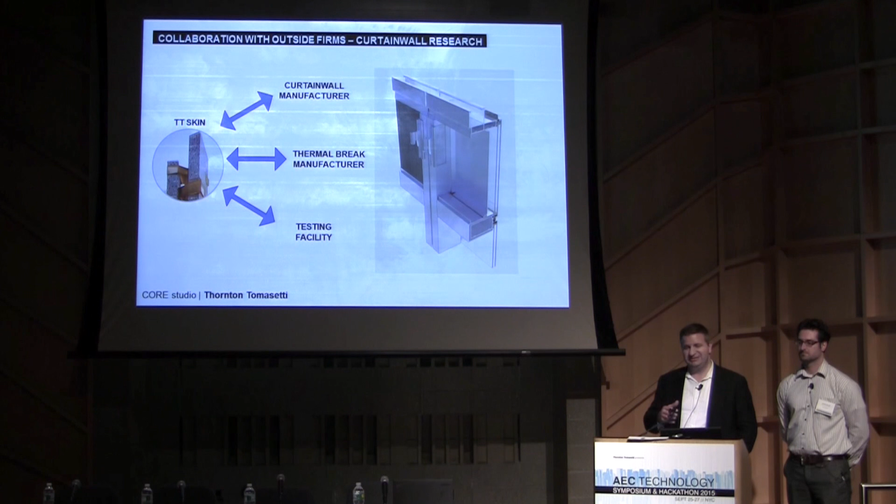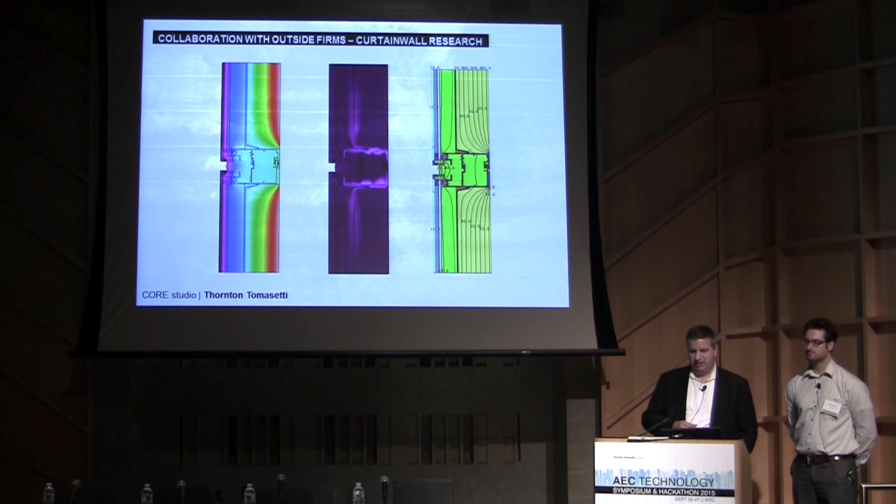Some of the stuff we do is also with outside firms. Our skin group worked with a curtain wall manufacturer, a thermal break manufacturer, and a testing facility to work through different curtain wall details and come up with much more efficient ideas with seals and different materials, really pushing the curtain wall envelope efficiency. And of course, we 3D print, mock up, and test as well.

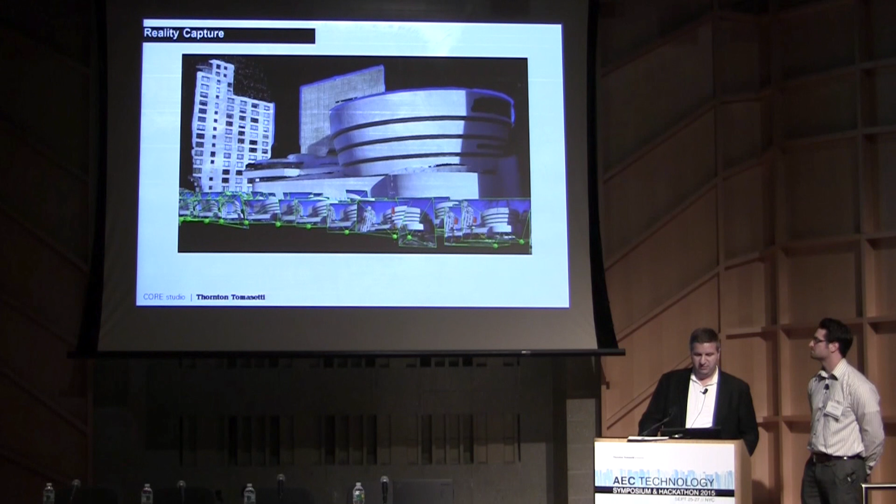One of the big projects we've been working on over the last couple months, for a number of the core group and also other parts of our firm, is reality capture, also known as photogrammetry. We're looking at things like laser scanning, but primarily we're looking at the technology behind photogrammetry, because we feel that's a real push for the future to really capture existing buildings.

A lot of our firm does work on existing buildings, whether we're analyzing an existing structure, building an addition onto one, or analyzing something that unfortunately fell down. We're able to capture that information in much easier ways now. In the past we've used laser scanning, but currently we can just take photos and generate pretty accurate 3D models. So we've been developing a number of technologies around that and investigating a lot of different software.

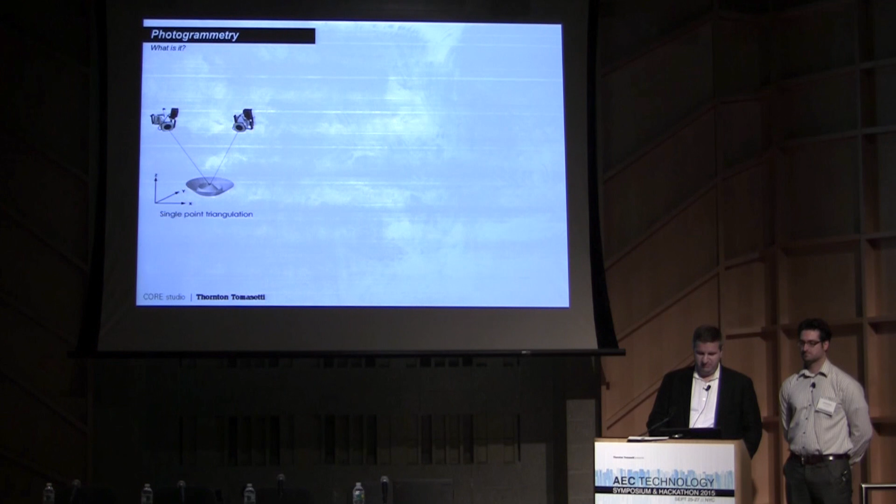In case you're not familiar with the process, it's basically a series of photos. Sometimes you can use GPS to increase the accuracy, and you can generate pretty nice 3D models to work with. It works kind of the same way your eyes do, where you focus on an object and recognize it and get depth perception from it, but it does that across thousands of photos, thousands of times, and you get pretty nice 3D models.

And of course, we take that to the next level by adding some drones. We have a few drones in our office now that we use, probably in about 15 to 20 jobs so far.

So bring in the drones. Basically, it was in a tricky spot to investigate unless you were in a boat or something like that, you couldn't see a lot of the damage.

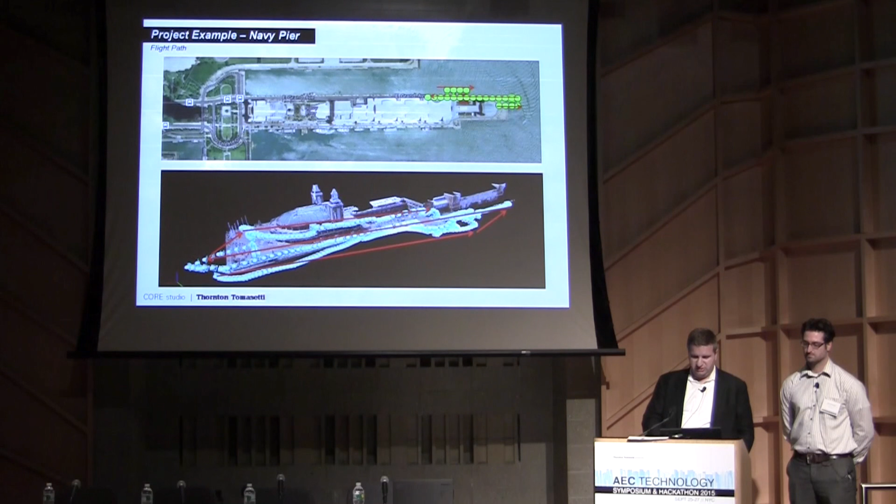So essentially we fly the drone past that whole pier, and we're able to regenerate a 3D model from those images. You can see here all the geolocated images kind of in space.

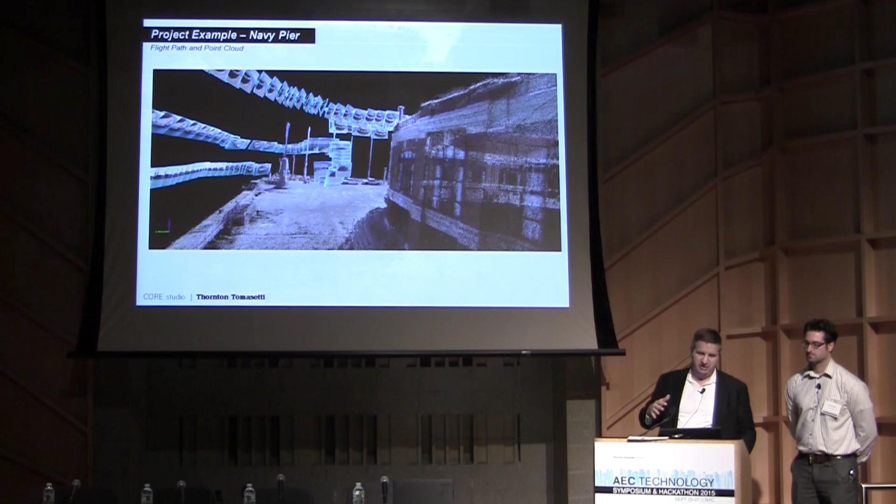What's nice about this is it creates a point cloud that we can work with and see some of the damage, but also get a located record of all these photos. A lot of times our guys are on site taking tons of photos, and then you get back to the office and wonder where that little crack was. Now you know where it is because you can go into the model, click on these images, and bring up the original image where it was taken. So in this case, this is the actual photo above and the 3D model below.

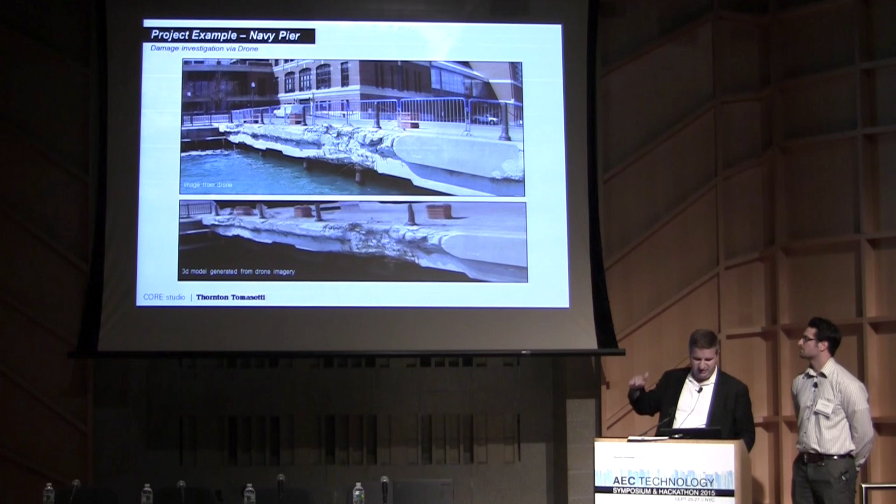Where this was beneficial for us was in the initial design, we're able to model a new roof on top of this 3D scanned photogrammetry model. It's a way quicker process than the laser scanner, and also a lot less expensive, because all you need is a small camera versus a $75,000 laser scanner.

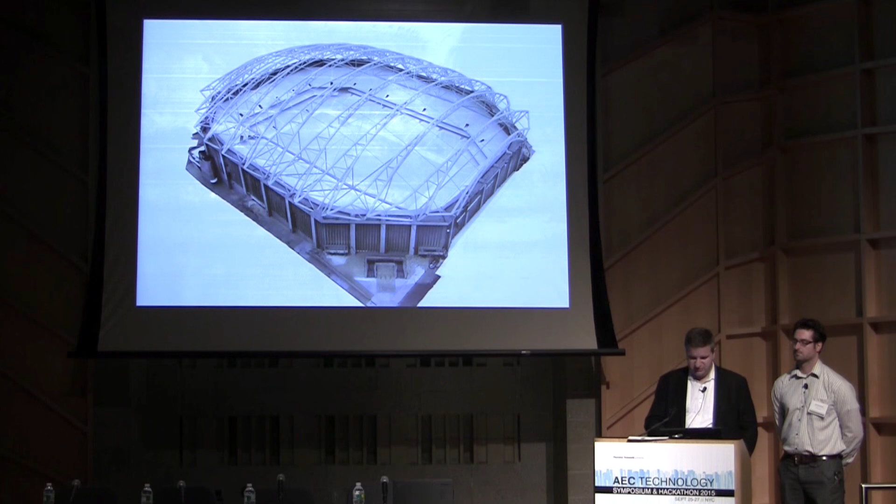Another thing was this damaged structure at a plant in the Midwest. That's supposed to look like that—well, it's not supposed to look like that, the building blew up, but the model's supposed to look like that. That's a fairly accurate model. You can see all the drone photos and some of the ground photos where they were taken.

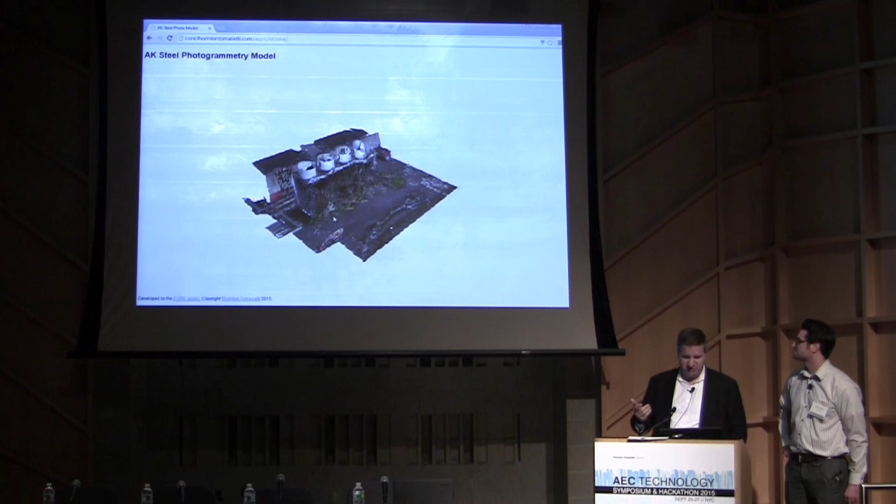And of course, we're mixing this with some of the other technologies we have, with the 3D web viewers. So we can put this out on the web and allow all people on the team to see the information. This is a pretty lightweight web model, kind of low res, but it still gets the idea across of what parts of the building were significantly missing.

I'm going to skip this one.

Our guys in New Zealand are using the drone and camera for all the damage that was done down there. So they can get these nice, very detailed 3D models and see all this damaged brick and things like that. What's nice is that you keep a record in a single model versus hundreds of photos.

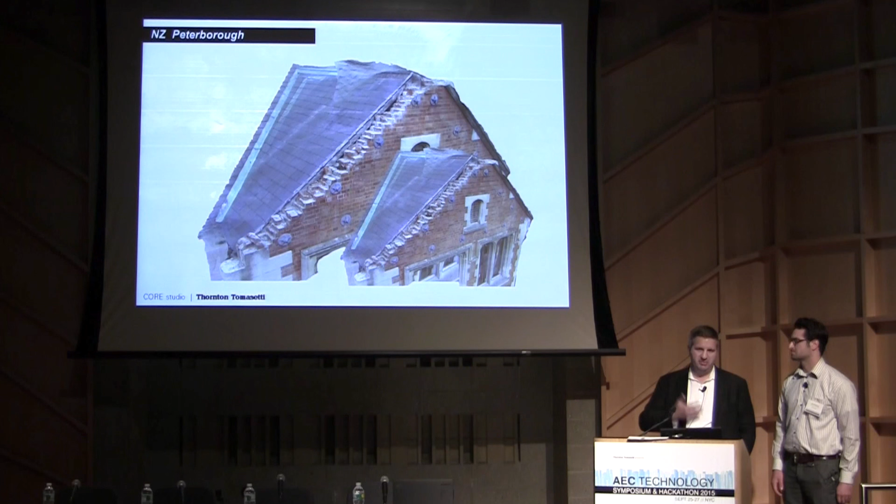We're looking at different ways to augment this now by putting it on the web and adding other information on top of it.

Some future stuff—we have a GPS unit we're experimenting with as well. It's accurate to 1 centimeter anywhere on the planet, which is pretty good, I think, for the construction industry. I think that should be good enough to start with.

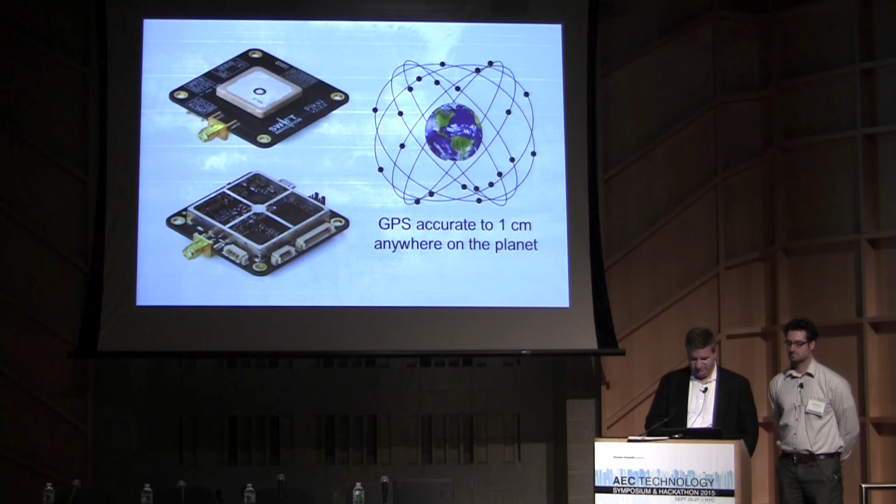Also things like this—these kind of targets that the camera can identify and help locate where you can't get GPS. So on interiors, we can put these on the ground and get the model information in size and dimensions fairly quickly. I'm going to hand it over to Dan now.

Thanks, Justin. So how many people have heard of machine learning before? Okay, great, a lot. How many people have used machine learning before? A fair amount too. Good.

So then I have to do less to explain it. For those who don't know, it's a class of algorithms that use statistics to find patterns in data. We wanted to know—it's being used all over many industries—how can it be used? Can it be used in the AEC industry? So I'll show some experiments to see if it's viable for us.

Now, usually when you talk about statistics in engineering—I'm a structural engineer—it usually brings up the conversation of error. There's always error in everything that we do. So I love this quote: structural engineering is the art of molding materials we don't wholly understand into shapes we can't fully analyze, so as to withstand forces we can't really assess, in such a way that the community at large has no reason to suspect the extent of our ignorance.

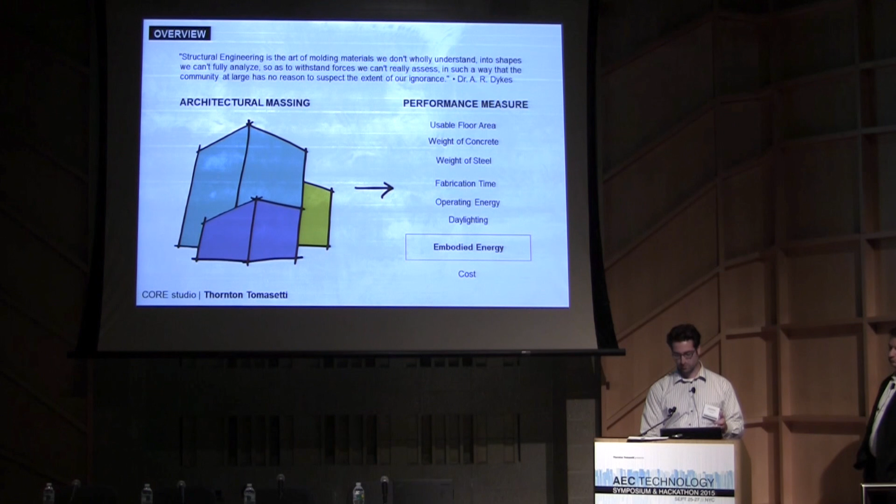So the only way that I know of getting embodied energy is through going through the whole process and doing a simulation. So let's simplify it a little bit and then try to use superposition after it's all done.

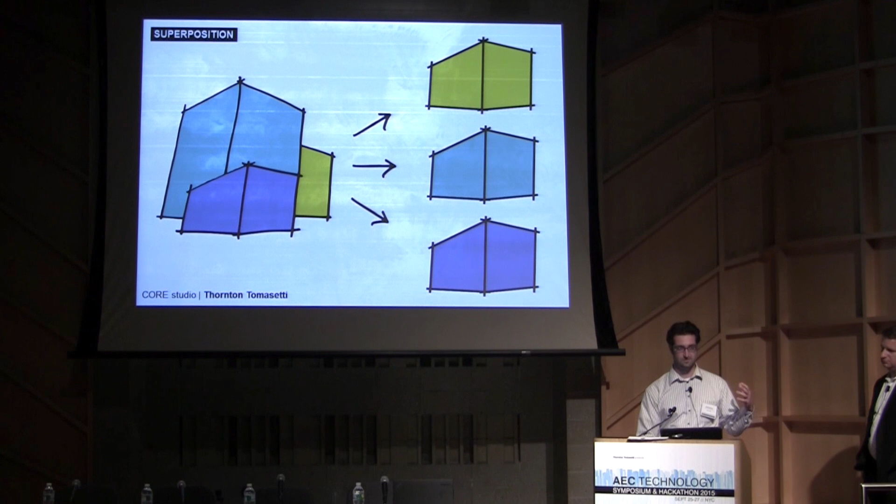So we set up a parametric model. This is just a case study of a rectangular building with 8 or 9 input variables. And so we run through the whole simulation of the design. We calculate every beam, every column.

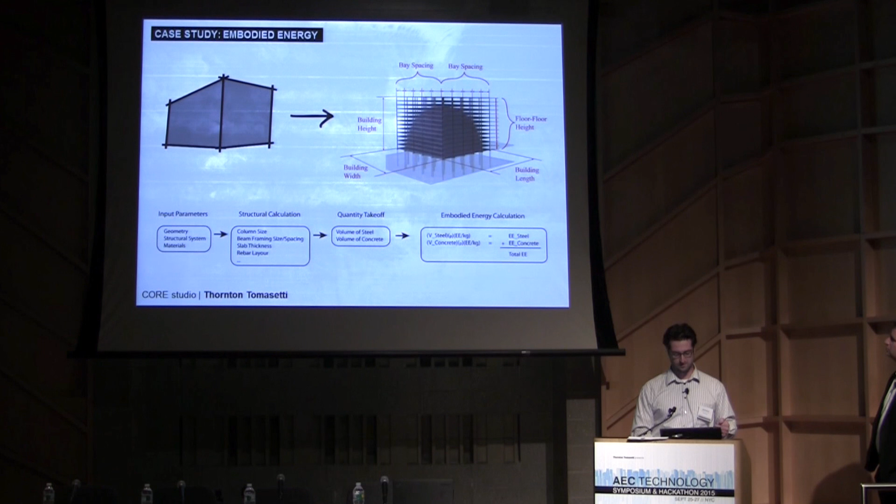It's still a bit of a simplification. We don't have a wind analysis in here, it's just gravity loads. But in the end, we get a takeoff, a representation. We can do a concrete building, a steel building, and get the embodied energy after we're done. But when you have 9 different parameters and a bunch of sliders in Grasshopper, and you're trying to go through the calculations, it starts to get overwhelming really quickly.

So you have to overcome the curse of dimensionality. And how do we do that? I mean, even if it takes 5 minutes, which I think is impressive for a full-scale building design calculation for embodied energy, if you have 10 million different possible combinations, that's going to take you 95 years. And that's just for one output.

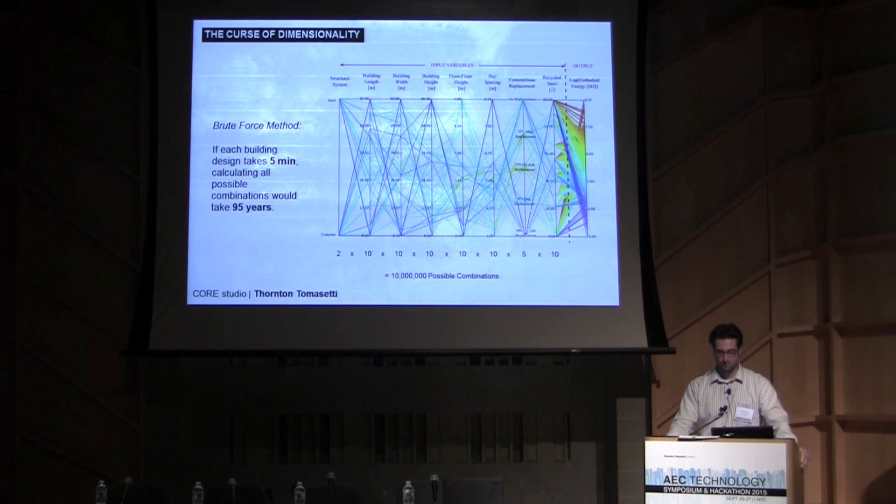So how can we make this more digestible? Well, we can just give up, or maybe we use genetic algorithms, but then we don't have an idea of the terrain, right? Imagine Mostapha's Design Explorer, and we really want to give the ability to provide feedback quickly and change parameters, and be able to work with it in the fast-paced design process.

You could do cloud computing or other parallel technologies, and I do think that's a great idea, but I think that the computational complexity of architecture is going to match that. As soon as you give better computation, you're going to just push the limit further. And brute force is probably out of the question, right? Well, I'll come back to this.

But for now, let's try a new approach. And as you have all shown, it's not really a new approach. We all know about it.

Basically, the applications range from facial recognition to recommender systems to control systems, and even being able to have a helicopter fly upside down. So if helicopters can fly upside down, maybe we can design better buildings using this idea.

So we run through, collect a series of simulation results, and we use k-fold validation to take a training set, and at first it's, say, 10% of the population that we've simulated. We did about 5,000 different simulations. Part of the goal of this is to find the limits. Let's push it, it's an experiment. We're just going to see where it goes and will it even work.

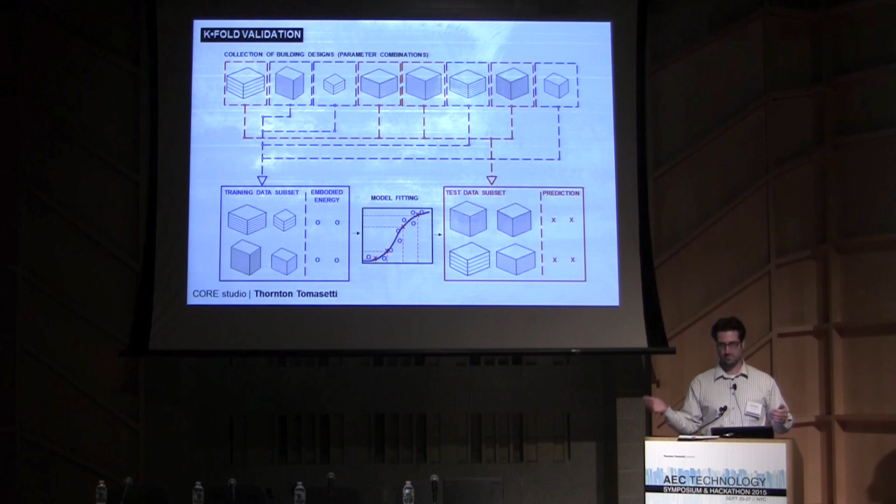So first we take 10%, then 20%, and 30%, and we fit a model to it, and then we see how well our prediction is by comparing it with other samples from the test set that we know from the simulations. And so we use 2 different algorithms, both regression models: one polynomial regression and the other decision tree. And you can see that the algorithm is, in fact, learning, because it's doing better over time.

The error is decreasing. And the question is, how many do we need before we get a good estimate? And what is a good estimate? What's an allowable threshold of error? If you want 10%, then maybe you can do that in 1,500 or 2,500 samples. If you're willing to accept 30%, then maybe it's more like 1,000.

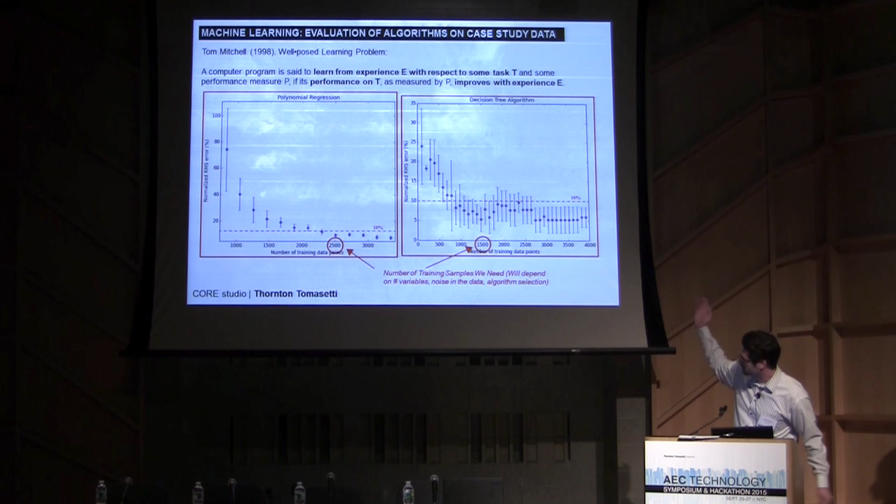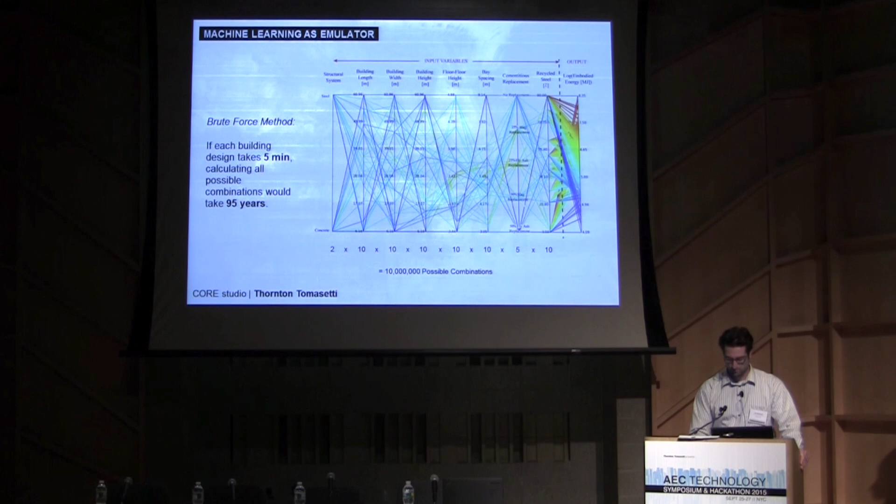And so coming back to this idea of the brute force method, and the example where it would take, hypothetically, 95 years, well, we used machine learning as an emulator, and we did all 10 million in about 45 minutes.

And so now, in the platform of the Design Explorer, we can explore our data, and actually that brings new challenges as to how you explore that much data, so that you're just seeing a subset, because now it can be interactive. But we also do a sensitivity analysis, and we can actually see which parameters are the most valuable, which makes the most difference, and what are the connections between your parameters.